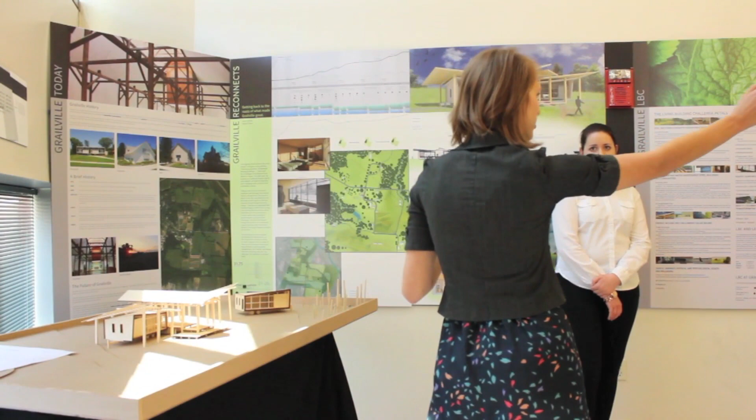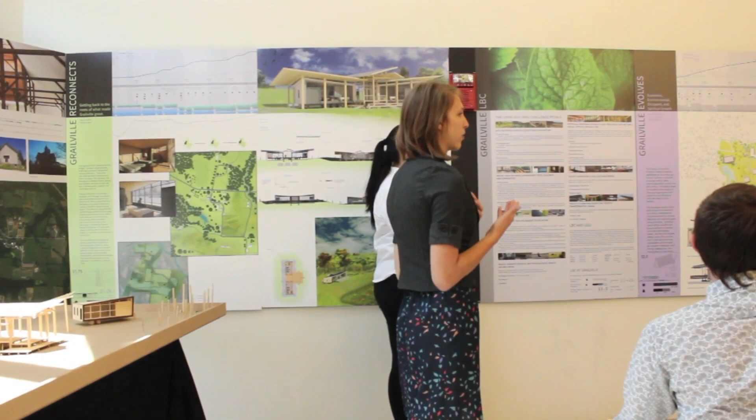Let's get started. To briefly introduce Grailville Retreat Center, the structure of how our studio ran, and then the structure of this critique. So I'll start with the structure of our presentation. You can start over here, and then we'll keep going that way until we hit the last board. The boards with the gray bars on the side, so this first board, Living Building Challenge, Energy, and Water, those are more general boards of research that we did, and they apply to everyone's project. And then the colored boards in between are individual projects done by teams of 2, 3, or 4 people.

How our studio worked, it was set up kind of like an office. All 11 of the 4th year architecture students, who are graduating Saturday, worked together to research all of these things, and then ultimately broke down into smaller groups to look at different ways to go into Grailville and different approaches to it.

So to introduce Grailville, if you want to look after the critique, we have a bit of history. It's a lay Christian organization that was started over in Europe back in 1921 in Holland. And the main missions that the Grail focuses on are equity, justice, education, responsible stewardship, spiritual art, music, and liturgy. And so we wanted to carry forth those key missions into our new approaches.

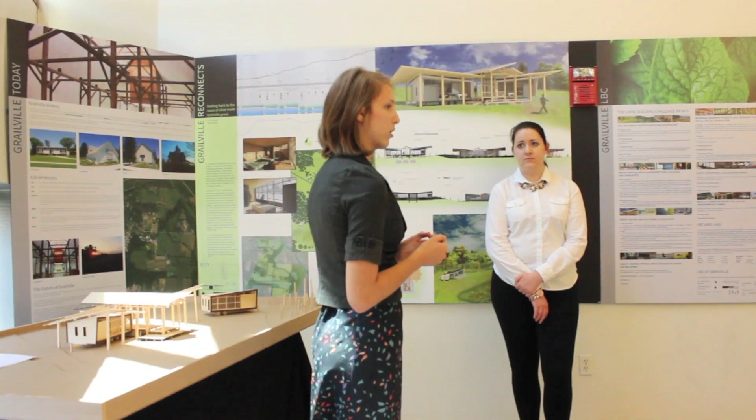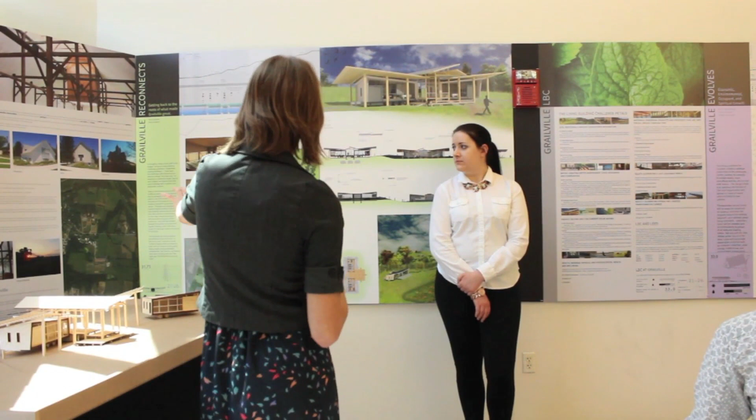They also currently have housing for 50 overnight guests, and they have a dining hall on site. A big client they have is Life Success, and then they have a bunch of smaller groups. They also have an oratory, which acts like a church, so they can host some weddings, across from the main farm of Grailville. And the farm is about 380 acres, a good portion of which is organic certified land.

So I'm Emmy Jensen, and I just want to talk about one of the frameworks that we used for this project, which is the Living Building Challenge. I think most of you have a sort of familiarity with it, but for those of you who don't, it's meant to be the highest standard in sustainable project design. I'm sure many of you have heard of LEED, and it differs from LEED in the sense that LEED gives a variety of objectives, and you can sort of pick and choose a certain number to achieve LEED certification.

But in order to be Living Building Challenge certified, they lay out a variety of imperatives, and you have to meet every single one, and it is all or nothing. So it's a pretty big challenge to meet, but it's something that we really incorporated into our design because we feel that it applies so strongly to Grailville's mission.

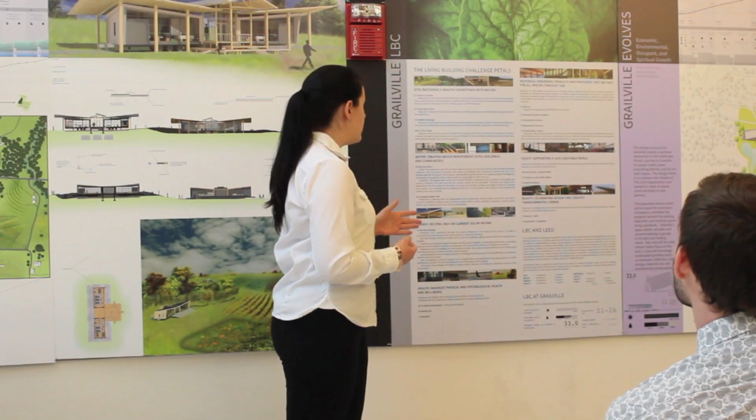So you can look at this and read in detail about how we addressed each specific imperative, but the ones that we focused on most strongly were water and energy. Basically what we have to do for each one of those is to have net zero water and net zero energy. Currently, because of the way that the law and codes are organized, it's not quite possible to achieve those yet, but part of the Living Building Challenge is to raise awareness and to try to change those things so that we can someday have buildings that generate their own water and their own energy.

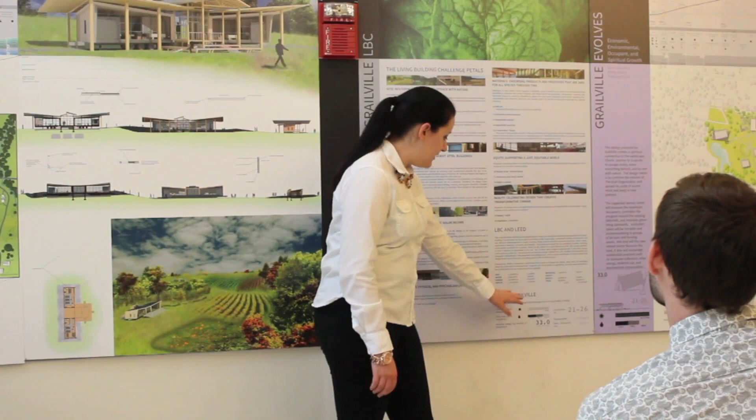Each project you will see has this little graphic in the corner, and this is a key that explains what everything means. Basically, this is how much energy is produced, how much water is used, the cost of construction per square foot, and the cost premium is how much more it costs to build an LBC building versus a typical construction building. So you can see through each project how that applies.

Also, with this bar at the bottom for the water usage, you can see there's black, gray, and white. It relates to black water, gray water, and white water. So white water is sort of like potable drinking water. Gray water is used for irrigation, and then black water is used for like toilets and stuff like that. So black water's toilets. Sorry. So that shows how much water is used comparatively for each project. And it's a lot easier to generate your own gray water versus white water. Usually that has to come from the city.

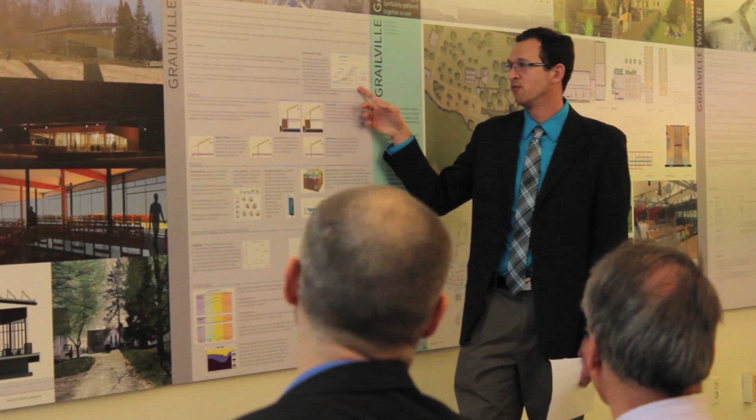A lot of the energy research that we looked into for Cincinnati in terms of weather, but also passive heating and cooling strategies. And the information down here is just basic information about the climate, which I'm assuming most everyone is familiar with. It says that there's a lot of cloud cover. It's also humid during the summer a lot. Wind primarily comes from the southwest. So we took that information and we looked at heating, cooling, and daylighting, and then solar PVs. There's a basic comfort zone that people have, and these strategies allow us to extend that comfort zone into different seasons or different temperatures.

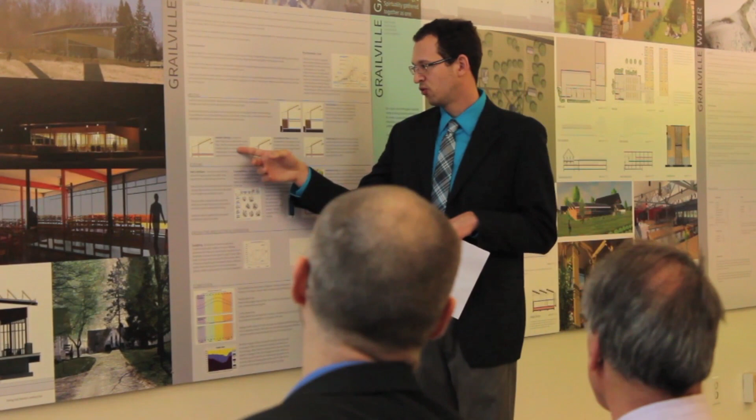So for heating, we looked at radiant flooring, controlled airflow, like moving air through a wall. We looked at thermosiphons, which use rocks to pass heat into spaces, and Trombe walls, where the walls themselves allow heat to travel from outside to inside. And then for cooling, we looked at different types of ventilation, whether it's vertical or horizontal, so stacked or cross ventilation. Desiccant waterfalls remove the humidity out of the air so that it allows you to feel more comfortable.

Geothermal loops can be used for heating or cooling, but the tubes are underground, and underground stays about 55 degrees all year round. So it's a good way to moderate the climate inside. And then a cool tube takes air from the exterior, passes it underground, it cools the air, and then it's pumped into the space. So we used all these strategies in our projects. We picked and chose which ones worked for our designs.

Hi, my name is Jessie. I'm going to talk about water. Water, as LBC outlines, needs to be used and then put back into the environment, and this all needs to be done in a way that is chemical free and doesn't draw water from places that aren't on site.

Unfortunately, the way ordinances in Loveland are structured right now, it's not legal to use your own water catchment as a potable water source. However, rainwater can be used for non-potable purposes such as toilets, landscape usage, and other agricultural uses. So we focused on making sure that we were collecting enough water to be used for those gray water purposes, such as toilets, and then also worked on decreasing the amount of water we need to draw from the city for potable water purposes.

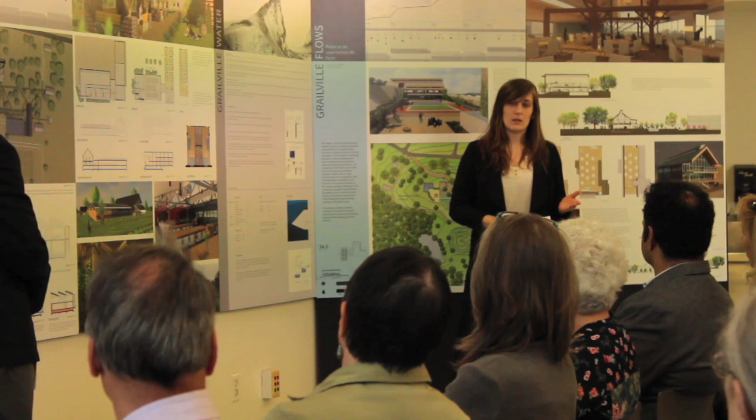When we're looking at water catchment, we're looking at doing that off of surfaces such as roofs and canopies, not wanting to get water from any sort of underfoot surface because that can involve contaminants and animal fecal matter. So we're looking to keep that reasonably clean at least. And looking at first flush systems, a lot of us use this system, which involves a flotation ball so that the first flush of water, which involves twigs and bird poop and all the things you don't want to pump into your system, gets captured, roughly 5 to 10 gallons.

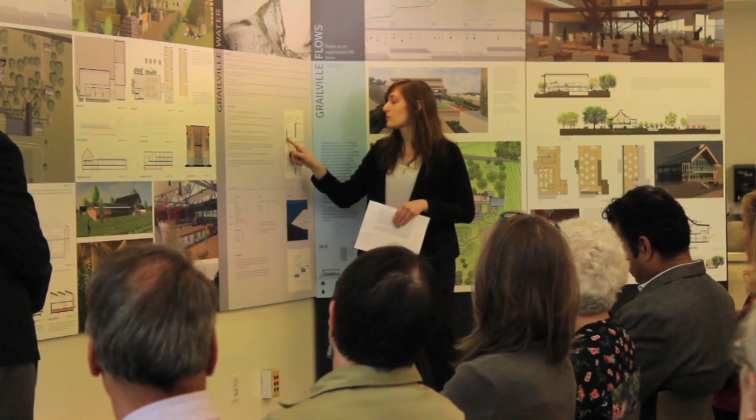And as that's happening, a tube is filled and a kind of flotation ball comes up, and eventually once enough water is captured for that first flush, it blocks off the opening for that first flush system and allows the cleaner rainwater to flow on to be used. And Grailville currently has a natural wetland that helps to process their used water. Ideally, all of this water is still going back into that wetland and being processed.

Are there any questions about the initial research? Paul and I actually used biodigesting toilets too, so it's all out there. It's all different types of ideas. Yeah, it varies by project. We looked at all these things.

Then one question about that water consumption that you mentioned: after you implemented all your strategies, your potable water consumption from what it used to be has gone down to that amount. How much of that potable water that you're drawing from the city is actually used for potable purposes? Well, we debated a lot about whether laundry was a potable purpose or how we wanted to work that.

And we kind of just decided that the way we were collecting water was going to be more geared towards the lesser of the functions. I think we ended up deciding that laundry really was something we wanted to play it safe with, and that's kind of where we ended up on that.

Is there a definition for potable water? I mean, what is it, or is it a gray area? Typically, it's water that is drinkable, consumed. So the main purposes would be showering, cooking, drinking, and other hygienic uses. So you're considering showering because you can consume water as you're showering? Right. And dishwashing was the other. Dishwashing.

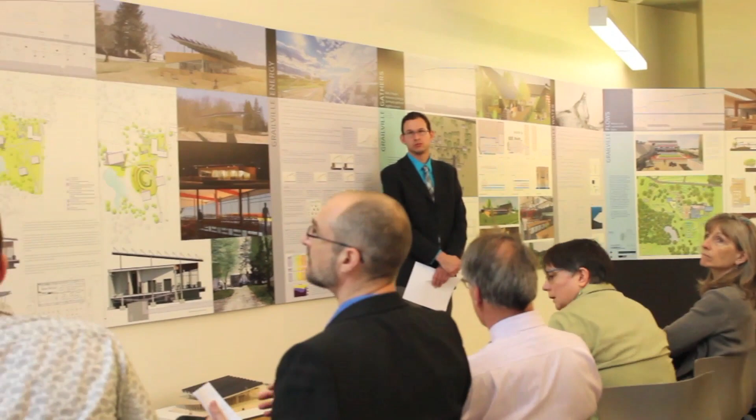All right, then I think we'll get started with our first project, which is Paul and Patrick down here in this corner. So there's two seats down here if you want to scoot your way down.

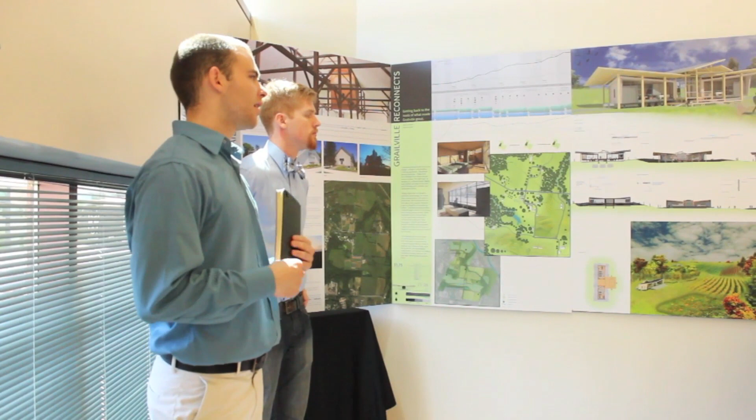So I'm just going to try and explain our business plan, and then I'll hand it off to Paul and he'll explain the building that we designed. For our business plan, like Mary said, we all took different approaches at this issue, Grailville. And our approach really was to return Grailville to its roots. We really wanted to scale back.

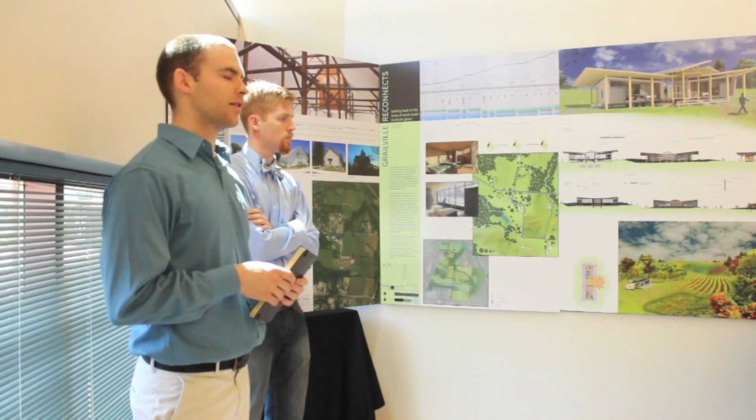So initially, in order to figure this out, we took a look at what was going on at Grailville right now, financially and all of that, and we took a look at what we thought would be a feasible progression forward from there. And the organic agriculture industry really stuck out to us, so that's the direction we pushed this all in. We were really pushing towards scaling all the other programs back down, retreats, events, everything like that, and really pushing organic agriculture.

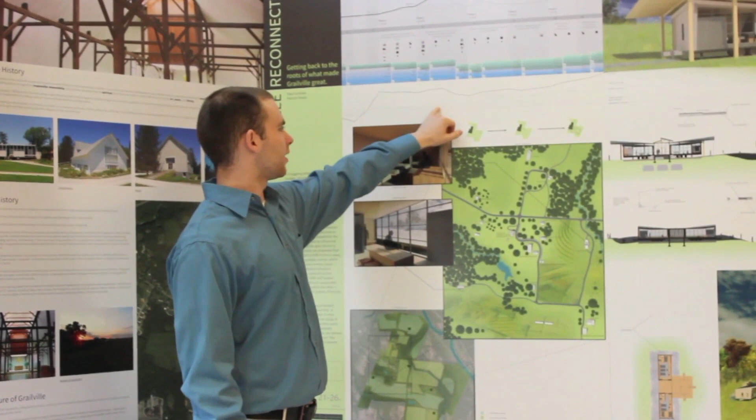To do this, we took a look, like I said, at the programs that already were happening, and the green line right here is agriculture, and we decided to push agriculture, which is also the green up here, and scale everything back down. So you can see as the phasing plan goes on throughout the years, we scaled retreats down and down, and we started building up more and more housing for agriculture because we really wanted to expand on the agricultural base that you guys had already.

And then once we decided that it's time to get back into retreats and we can build off the base that we just set up in agriculture, we designed this building, and the ideas behind it were really to be an extremely feasible and flexible building. Do you want to talk a little bit about the building?

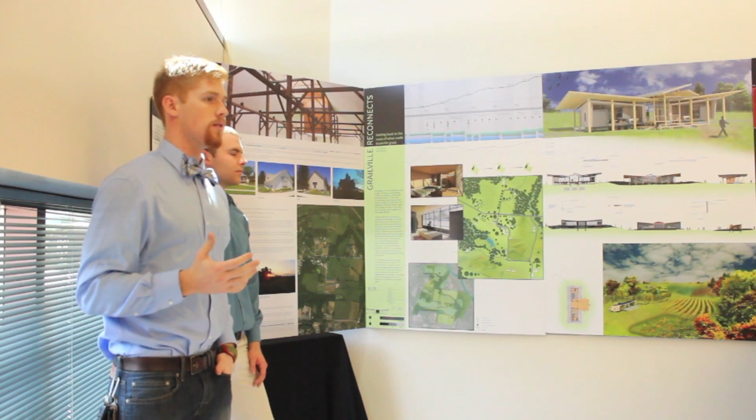Well, it really came down to this: we looked at Grailville and we determined that the most valuable thing that Grailville has right now, besides the people, is the land that it's on. Most of it is certified organic. It's gorgeous farmland which is becoming more and more valuable as the cities are sprawling out. And so we really wanted to take advantage of the assets that you have.

So in the vein of the agriculture ideas and things like that, we wanted to be as minimal as possible with respect to the finances, the impact on the landscape, the history, and so we don't think that very many enormous changes have to be made at Grailville. We think that with little tweaks here and there, we can start getting things back on the right track.

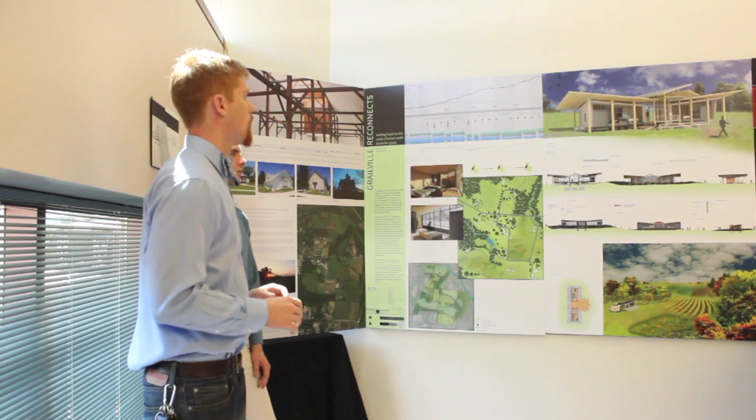And we thought that starting off with these small units would be the right way to do it. So just to explain a little bit about where these came from, from a sustainable standpoint, the unique thing about these units, which are built on flatbed trailers, is that they can be moved anywhere on the site. If somebody needs them over here, you can bring them over there.

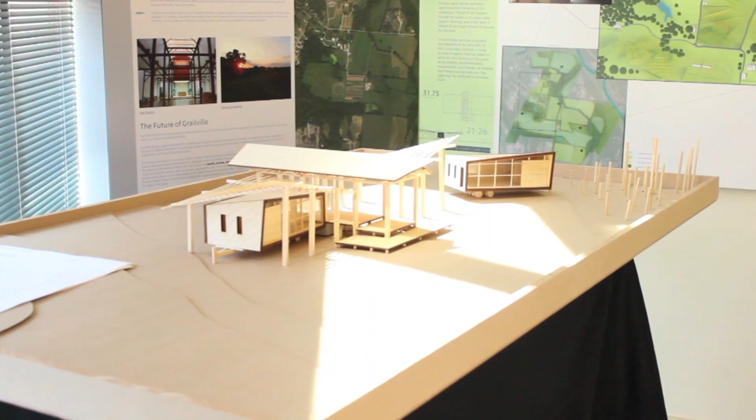If somebody needs them here. And so as we were looking at that and thinking, how can we move these things? How can we make it easy to move, and why would we need them to move in the first place? We kind of realized that the thing that makes the most sense about the movability of them is that you can actually change the orientation seasonally. So, for example, in the summer, you can shade it. In the winter, you can harvest the sun. And so that informed the movability of these things.

And we also decided that to make it easier, we would actually have sort of like a shell, a living unit shell, and then a sort of plug, sort of like a campsite. If you ever have been camping in an RV or a pop-up tent camper, you go to the site. There's a hookup for electricity and water, and so we kind of have migrated all of the mechanicals to the permanent site, which is, for example, this is the summer site here. It's kind of just a canopy for shading, and it's very simple.

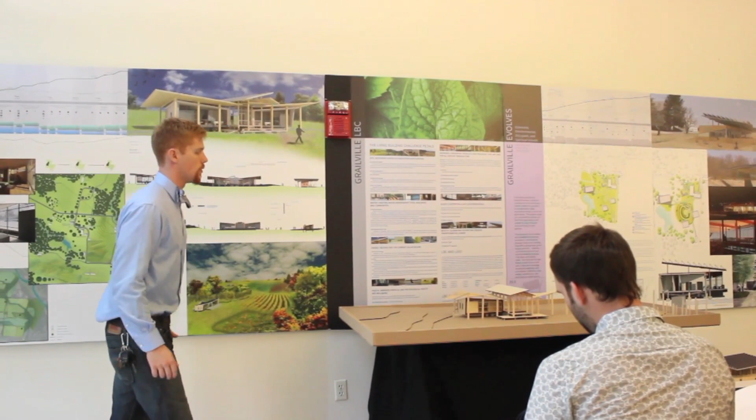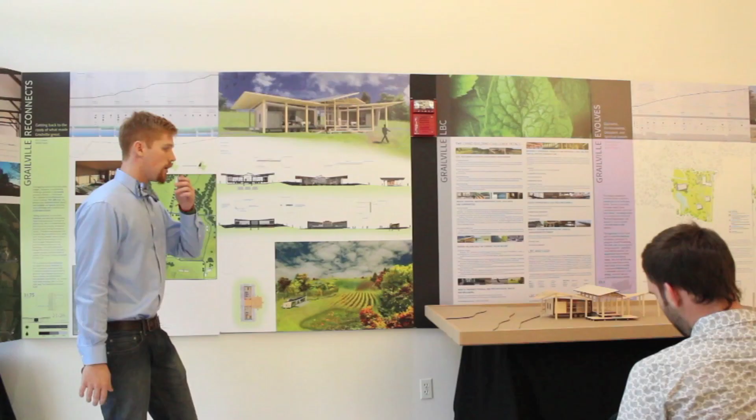It can be used even if the units aren't plugged in. These would be covered. You can harvest the rainwater on top of the roofs. You can put solar on top, and you can actually use the site itself as a way to collect rainwater. And so all of this is kind of contained within these little sites that sit fairly unobtrusively on the landscape.

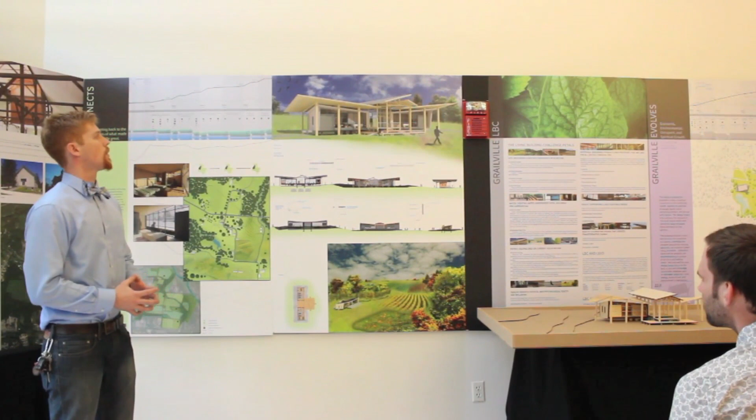And they can be used for other things, like if there is a group that wants, for example, a yoga group, they can go use the little pavilion if there's nothing going on. So we really wanted to make them as flexible as we possibly could, because we're not really sure where Grailville can go or where it will go. So these things can serve many purposes.

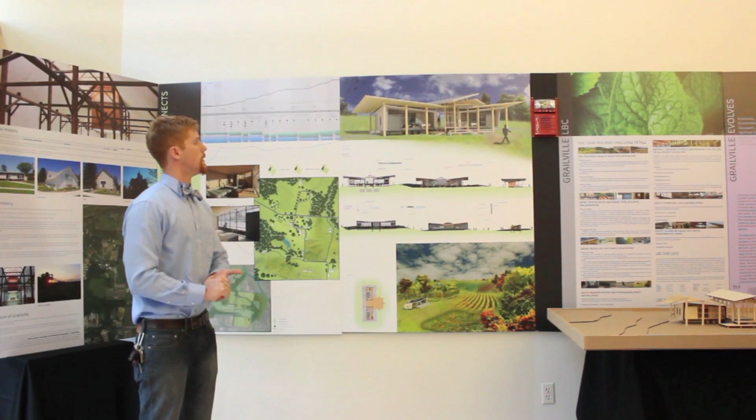There's movable beds. The beds flip up. You can put 8 people in one. You can put 4 people in one. You can move the beds from one unit to another, and so really they can be used for any sort of group that you could think of. And yeah, another good thing about keeping it small too, and having the individual units and being able to move them, is by putting all of the stuff we needed to make it net zero energy, net zero water on the site, then we could keep as little of that out of the actual living unit as possible, which made it even more flexible.

If you look at the floor plans that I'm handing around, it's really just one room and a bathroom, and we were able to do that because we could keep all of the photovoltaics off the unit, and we could keep all the water stored on the site and all the water catchment on the site. And by keeping it small like that, we were really able to reduce the cost per square foot and increase the feasibility of making it net zero.

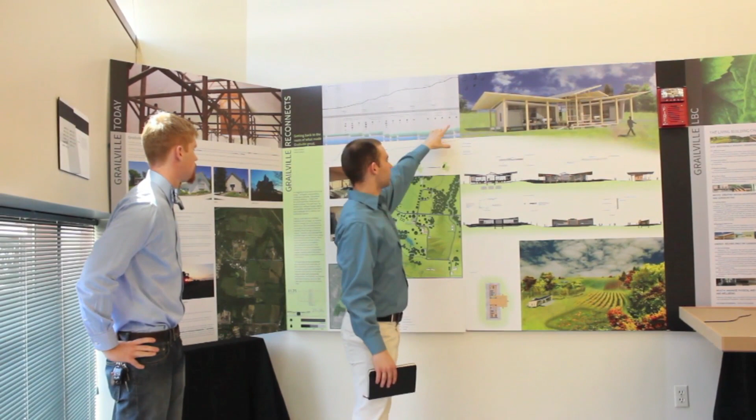That was kind of the idea of scaling back in the beginning and really letting that organic agriculture business idea take root, and then from there we can start to build back up, which is kind of what this is showing. We scale everything back down, and then as we need it, we can start to build back up and get more and more units and more people. And that's actually kind of what this was showing. We gave you additional ideas of where the units could be, which spreads out the program of Grailville.

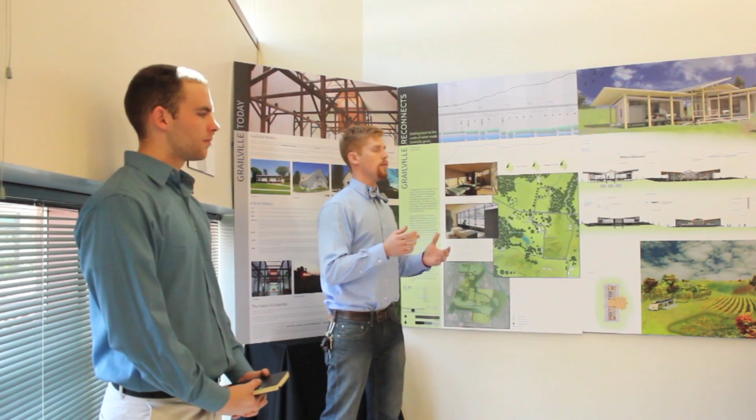Initially, from the beginning, if we are starting to move heavily into the agriculture, there's kind of going to be a rift between the hub of Grailville and then the agriculture. It's kind of going to be separated, and that's just how it's going to be initially. But once we start building these little things, you can put them out here, because nobody ever goes out there, and it's a beautiful site. And we felt that with the hub being so concentrated, that maybe there were some missed opportunities of actually exploring the site, especially in the summer.

We think that in the winter the units would be closer together, closer to the hub, closer to the dining, just so people don't have to walk in the winter if there's programming during the winter. But in the summer especially, people are more willing to walk outside, and so it spreads out. And the other thing too is that you can start making connections between the retreat goers as they start ramping back up and the agriculture.

Maybe you have something where you have intern farmers who are working seasonally. Maybe if they need some housing for just a week or something, they could live in these things, or you can start having interactions between the agriculture and the retreats, and then you have a new dynamic going on where you're kind of rebranding yourself as this sanctuary of sustainable farming and land stewardship.

Again, I'm Mary, and this is Emmy and Bo. And our project extends from this purple bar over to these lineup pictures. And the models we have up here are the site model and a model of the new dining hall, which would be a new building on the site. So, to begin with, when we visited Grailville, we really felt a connection with the landscape, with the pond, with the woods, being one in nature.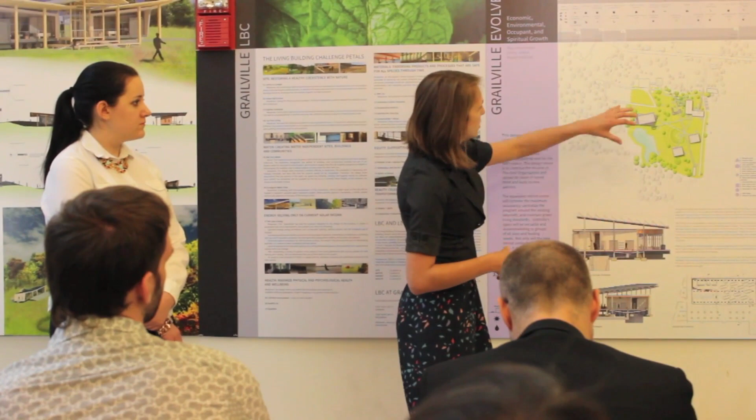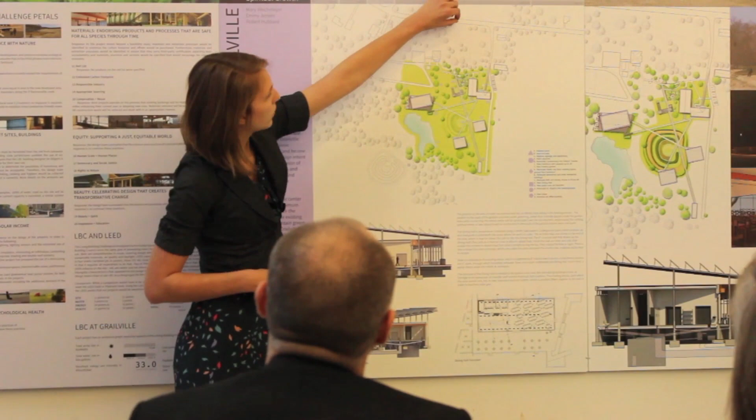So up here is the current hub with the House of Joy, Dining Hall, Hodier, and Caravansary. And we kind of drag the hub down to create this new piece. So we have a new dining hall being built and two new lodges. I'll briefly take you through the procession of the site. So as you approach on O'Banionville Road up here, you come down to this drive, and there's gravel parking here, and then handicap parking up here with some more gravel parking. You walk out of your car, and that image down there is the image that you see as you step out of your car.

So we were trying to figure out, for guests coming to the retreat center, wayfinding, how they would enter the site, what their first visions would be. And when we visited it throughout the semester, we were standing on that spot, and we were just like, this is it. Like, this is actually really cool. That's a very cool view of the Caravansary, which will be the new Welcome Center.

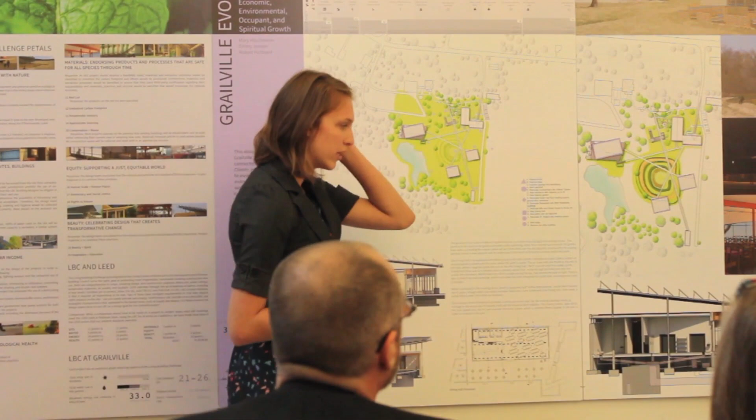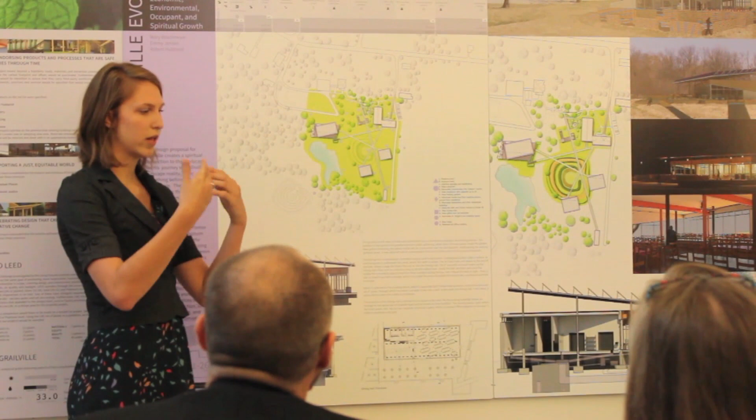And so with that idea in mind, after you step out of your car, we wanted the pedestrians to take dominance over the vehicles. So we would have a pedestrian walkway come right up to the driveway in front of St. Benedicite. So you would walk up to the top floor of Caravansary, which would be the new Welcome Center. It would have history on display, check-in, all of those types of things, and then you would walk through downstairs or take the elevator down, and then you would be in the new retreat center. So at that time, all of your vehicles would be set aside. You would just be in the nature here.

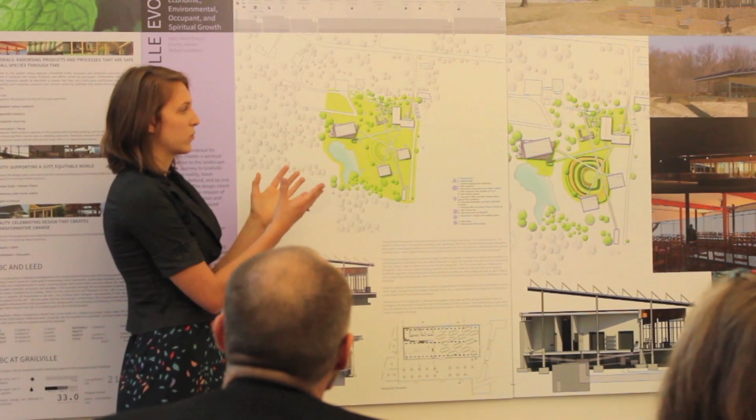And then from the Caravansary, you would walk to, if you're staying in this lodge, Hodier has first floor residential still. We're keeping beds in here because we have a 20-year phasing plan, so this bottom lodge isn't actually going to be built until 20 years later, so we need some extra beds there.

And then the labyrinth, we're moving down here to have it more private across the pond. And we would like to keep, though, an underlay of the labyrinth to signify that it was there. It is a big part of Grailville's history. So we would like to have some dirt paths come around, signifying the old path of the labyrinth, have different sections with materials, but still these hard concrete paths are more dominant in the space of wayfinding between the buildings.

So we have a 20-year phasing plan. Starting with the first year is mostly keeping up with the grounds, fixing the nature trail, adding parking, things we need to prep before we get construction. Then we move into a new lodge right away. We want to make sure that we have a place to put people before we start to add other new buildings. So we're going to add a new lodge. The first new lodge would be this one, sorry, yes.

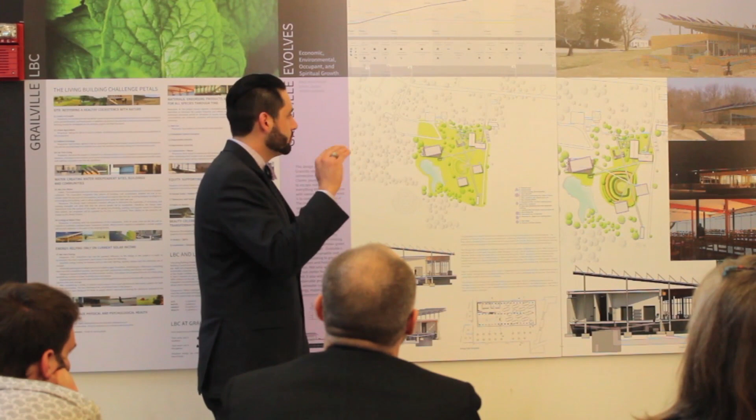So then we're about 3 years in, starts the third phase, and we're going to renovate Hodier and add meeting space upstairs. Right now the attic is unused. We're going to add meeting space up there. You're adding meeting space up there? Yes, like a big open floor plan space, just meeting, reception, whatever still needs to happen, but we're going to use that space.

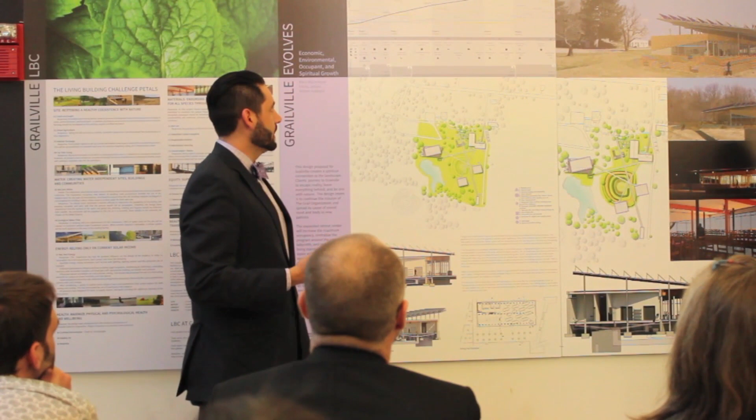Then we're going to add the dining hall, which is our LBC building. It's going to hold 200 people, and it has a lot of space on the exterior as well, which we'll get to later in the presentation. More aesthetics, but then begin to concentrate on moving everything into our new hub. Concentrating on this area, putting in the paths, connecting the buildings. We're going to move into gardening in this area, extending the garden you have right now behind Hodier in front of the House of Joy.

We're going to eventually remove the office building and move all of that into the House of Joy. And once we do that, this becomes the Grail, and everything else becomes the center. So the Grail has its area that the people from the retreat center don't really interact with. That becomes like the member area, but everything else becomes the retreat center. Which is the member area then? The old dining hall and the House of Joy. So it's almost like strips. So this would be the Grail, this would be the retreat center, and this would be more privacy, nature type area.

We also want to remove the Milk and Honey House and continue a path out to the road and move it closer to the road, more of like a farmer's market or a farm stand that you can see, so it gives the CSA an option to sell to more people than people that know that it's there. Driving by, you can stop and buy stuff. So where are you moving it? It's actually this way, it's off the map. So we're rerouting this farm drive from the barns to either, if it'll work, Route 48 or back over to O'Banionville Road.

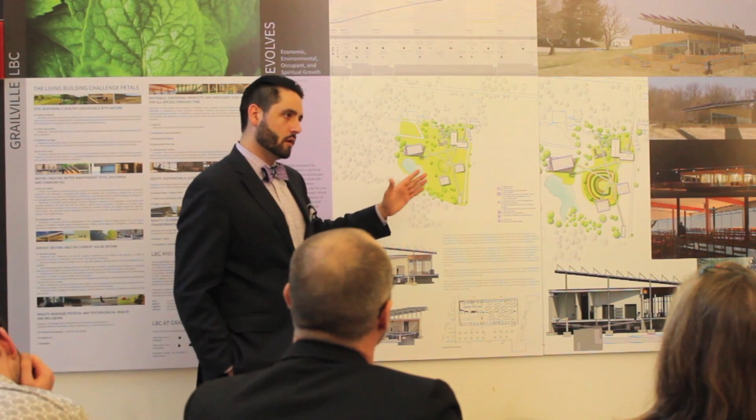Then the end of our phasing plan ends with adding a second lodge as well, which brings our total up to, depending on Hodier, since we didn't really concentrate on how many people were going to be in there, about 110 to 125 people. And then our new dining hall will seat 200 people, with the idea if there's a wedding, they can come over there and have a reception in the space, or a reception in the second floor of Hodier.

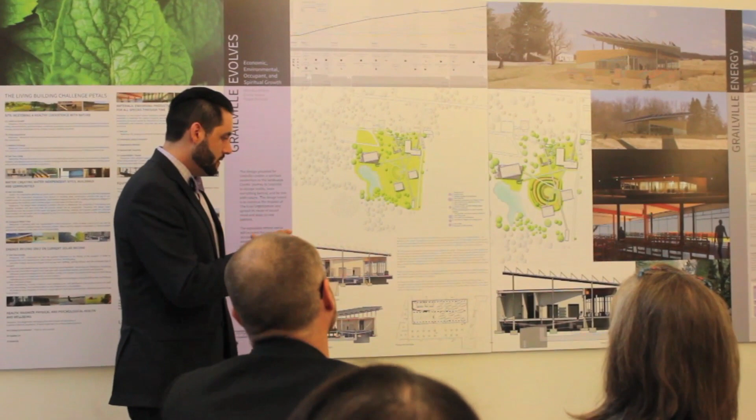The building has two different structural systems. There's two crossing column grids. All the buildings on the farm face the road. They're square to the road, and that wasn't optimal for photovoltaics. So we wanted to keep that feel of the farm, but shift the shading device on top to optimize the direct sunlight that we needed.

So that's how we're going to power the building, PVs on the roof. There's about 8,000 square feet of photovoltaics on the roof. Then cooling: we have a cool tube that runs underneath the pond. There are vents, you can see it in this floor plan, that go all throughout the space. It's going to bring the air up. There's also a fan at the base, just to force it up a little bit.

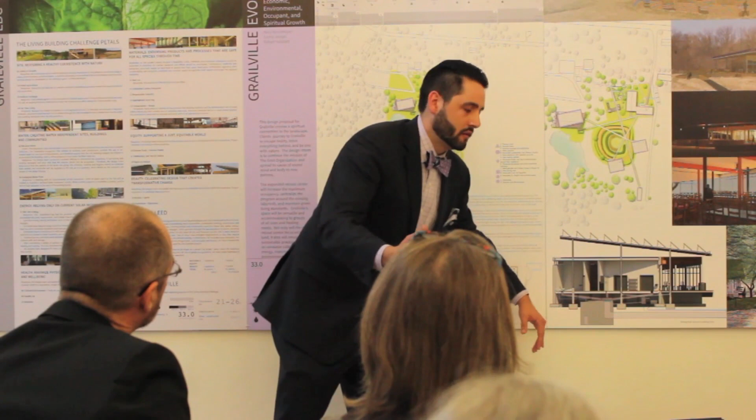Our water collection system is also in the shading device. It's tube steel that's going to run up to support the PV, and it comes back down with gutters built in through the structure. That's going to bring the water down to water collection storage under the ground. Can you say that again? Yes, ma'am. So the water goes down through the structure here, and it's collected into tanks below the ground. The tanks are kind of like what you have right now underneath the dining hall. We're just going to collect it from this rooftop here. And then there'll be two additional smaller tanks on the front deck where this structure comes down in the front.

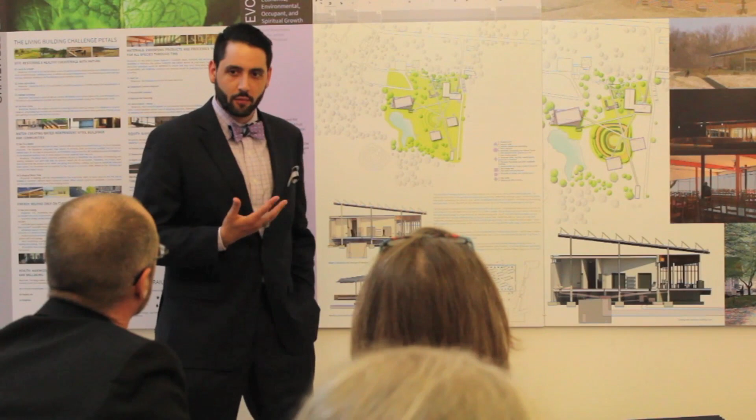Is the tube steel the downspout, or are you having an independent downspout separate from the structure? It's inside of it. You're not using the actual structure as the downspout? No, not the structure. It's inside the structure. So you have a separate downspout pipe that's surrounded by the structural tube? Yes. And what is the material of your downspout? I don't really have an answer for that. We didn't really talk about the actual material. Clearly, it's not PVC. No. I know I said that a minute ago, but as soon as I said it, I knew I can't do that. Cast iron.

And how does the water actually get to this downspout piece? Are there channels or something underneath there? Yes, where the column grid is, there are channels built in with crickets that can stop the water. As it goes further down, there should be less and less water being caught. That's why the very last row goes down to tanks on the deck to water the irrigation on the outside. Any questions?

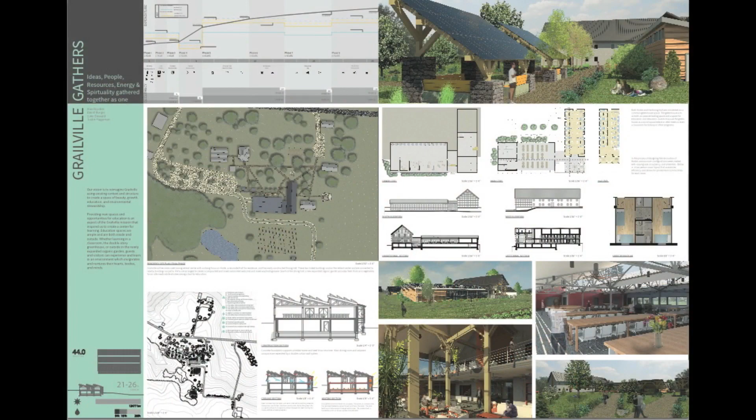Hi, my name is Luke Dewell. My name is Justin Hegeman. I'm Alex Reardon. And I'm David Burbank. So obviously you can see by the name of our board, Gathers. Our main focus was to recreate Grailville as a retreat center that has a cohesive design and can work for a lot of different people.

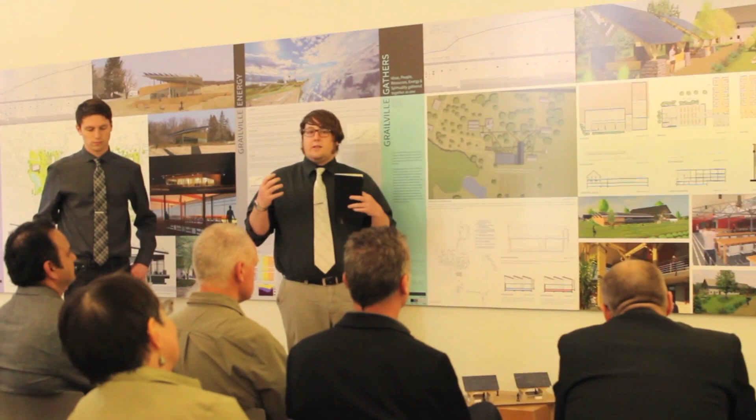We really like the land at Grailville, and we think one of your biggest problems is actually the hub itself. A lot of the people coming in are complaining about having to walk from where they are to the dining hall and back. We think that's okay; we really want them to be outside of the buildings, not just inside their living quarters. But it should be an option to be a little closer, and the hub itself should have nicer areas to walk through, so it's not just walking through and thinking, I'm behind the building, I need to get around to a different side. So we really wanted to connect things together.

For this retreat center, we focused mainly on two buildings, Hodier and the new dining hall, and those two combined create a larger client base for Grailville. We didn't want to exclude any of the client bases you currently have, but we wanted to upmarket Grailville so that you have more reach, both financially and to spread your message. So we focused on Hodier, it's kind of a complete redo, Justin will get to that in a minute. And this is the dining hall, David will get to that in a second.

For the overall site, in terms of procession, we kept the two main driveways Grailville has currently, but we reordered those functions. This is now the main entrance, and it comes down to this gravel parking lot. We wanted to offset the idea of a large sea of gravel, so there are plantings and trees within it. It's still a parking lot, but it offsets that a little. And there's also parking over here for access to Benedice and things like that.

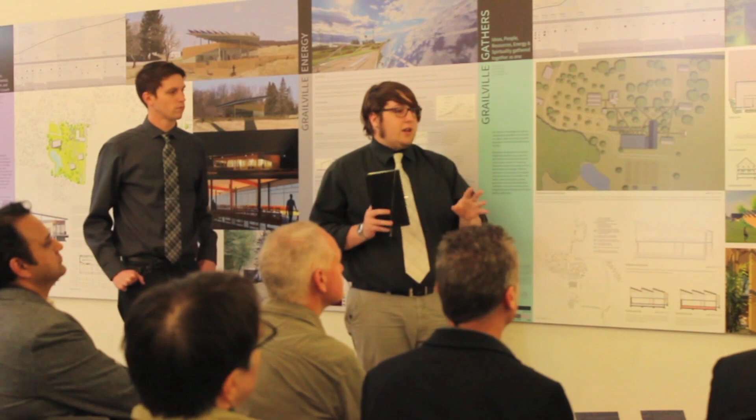Other than that, we've included some site pieces like a fire pit and a large speaking space. We also moved the garden space from over here and expanded it so that it's more of a key piece. You can see in this rendering that it's right in front on the site. When you get out of your car, you'd be here, and that's this view, looking straight over to Hodier. And the shading device, which Mary mentioned earlier, I call the solar pavilion. That's this model here, if you want to hold it up real quick.

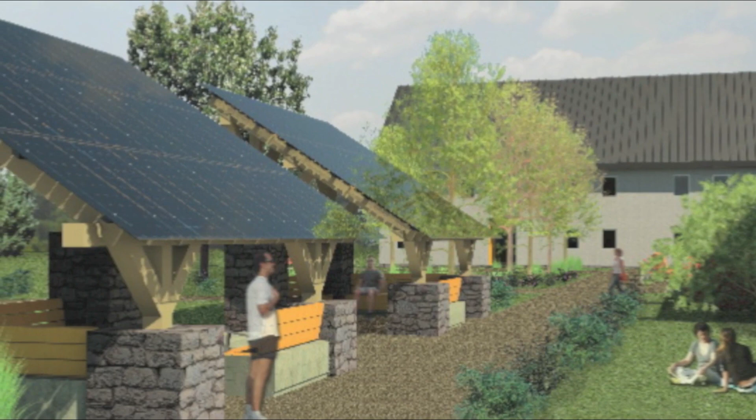So these are spread out through the site. So they combine the solar PV, some shading, and areas for people to meet around the site. You can see there's two more at the end of the garden and even more down throughout the site itself. These are kind of that educational piece so that people can see the PV. You can see what's happening in Grailville.

If you go into one of those pavilions, there could be a screen there to tell you immediate output of what's going on in the PV. You can see that energy that you're capturing at Grailville.

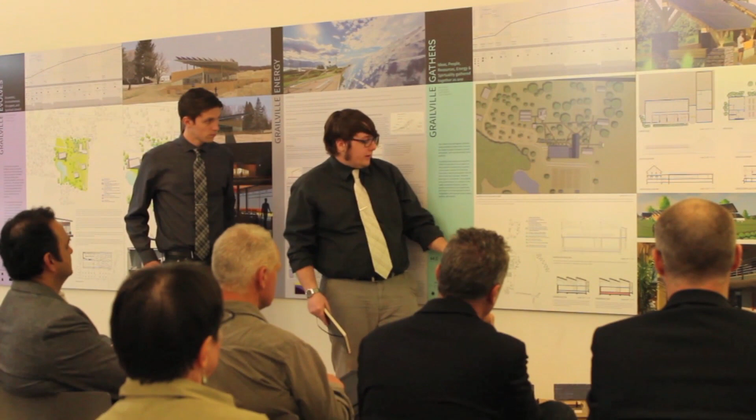So outside of the hub though, we've also included some major updates to existing buildings. We've added a new road coming from the back part where there's the farm and tractors, so that the CSA would have their own farm stand, connect up to the road, separated a little bit from the people that are maybe having a retreat on Saturday, don't need a bunch of cars coming in for people to get their vegetables.

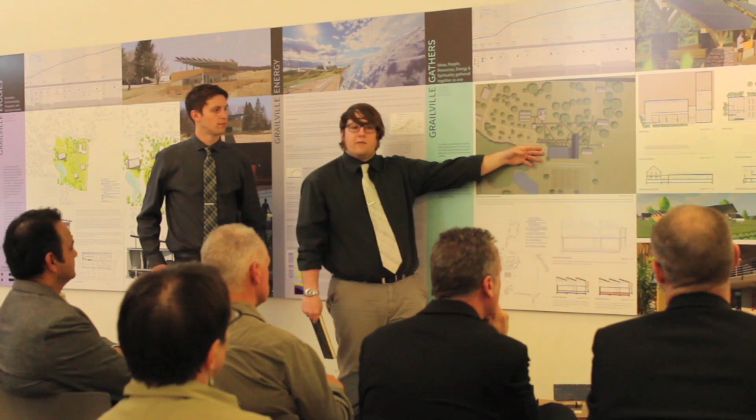And we've also expanded, hopefully Grailville can attract some more weddings eventually, so the dining hall is part of that, so that it is large enough to accommodate wedding space. But in the future, if it was necessary, there could also be a reception hall built up there.

So with Hodier right now, it currently has seating for about 26, and we were looking at a way to possibly make that more efficient or fit more people in there. We ran through a number of different scenarios where we looked at what was the best way to put beds in there. Was it to have one person with their own private bathroom, all the way up to having just 4 rooms with 15 people in them.

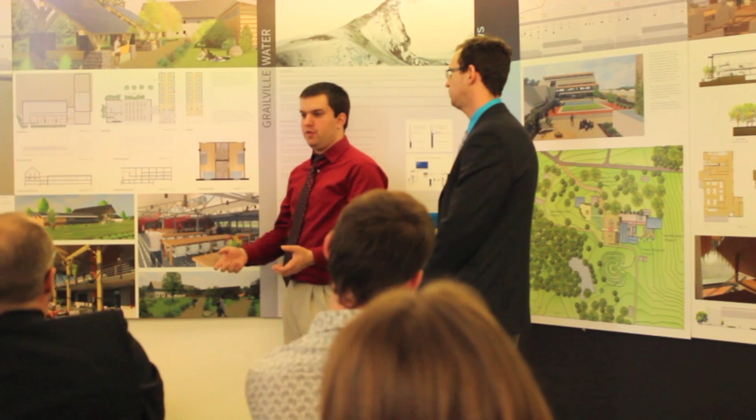We ended up settling on this configuration, which is 2 beds with their own private bathroom. The beds would kind of have the storage underneath where you have your drawers for people that were staying for a longer period. We could fit a desk or 2 in there for people that wanted it for meditation or writing in there. Hodier then, instead of 26, would hold 64 beds inside of it.

And then on the southern end of Hodier would be some indoor areas for kind of small activities, groups of 8 to 10 or smaller, and then part of that would be this greenhouse and sun space, which you see in this rendering here, which is part of the area that connects to the dining hall, but would allow for kind of an indoor-outdoor space that could be used throughout the year. And then talking about the dining hall, Dave is going to talk about that.

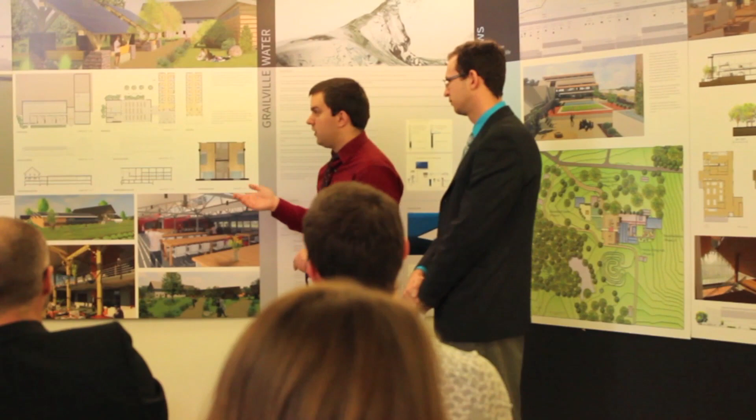For the new dining hall, I wanted to make room for about 200 people, for weddings or large events like this Easter gathering we had this last week. I decided to go with a sawtooth roof configuration. This would provide a couple entry points for sunlight to come in from the north side.

We had a sun space on the south side that overlooked the gardens, kind of reminding people as they're eating where the food's coming from. Now, probably not all the food for these 200 people would be able to be harvested from here, but it kind of reinforces the idea.

So we added kitchens that were larger because we felt the current dining hall didn't have adequate facilities for it. This would be able to serve 200 people, weddings, retreats, hopefully be more of a catch-all. Beneath the dining hall on the lower floor, we have a couple small classrooms, as well as a large space for storage and utilities.

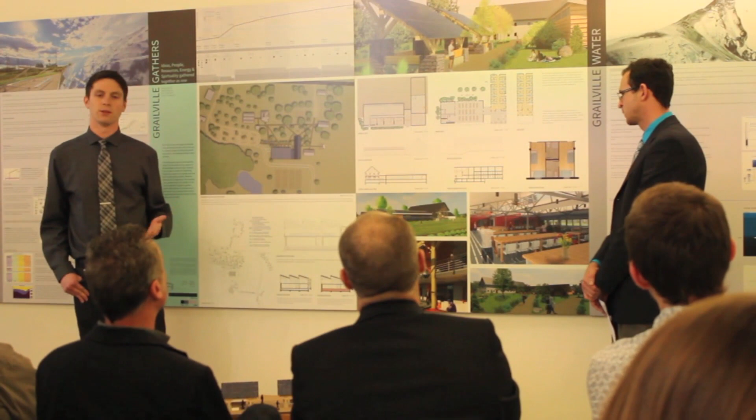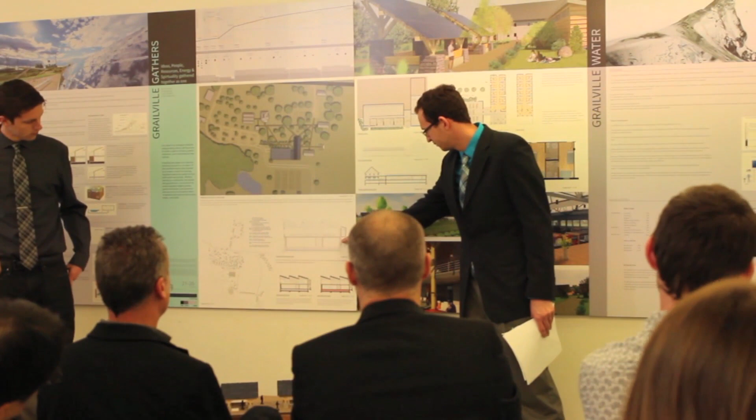We'll talk about the sun space then. Yeah, the sun space is about 4 or 5 feet in width, and it runs along the entire dining hall. It is used primarily as a way to harvest energy. So we would be heating the interior spaces via the sun space.

The heat would be gathered in this confined space and then directed through vents into this rock bed, which is below both levels. This rock bed would heat up, capture that heat, and then it could be released later. It wouldn't have to be released immediately, and it would be released back into the building via fans and ducts.

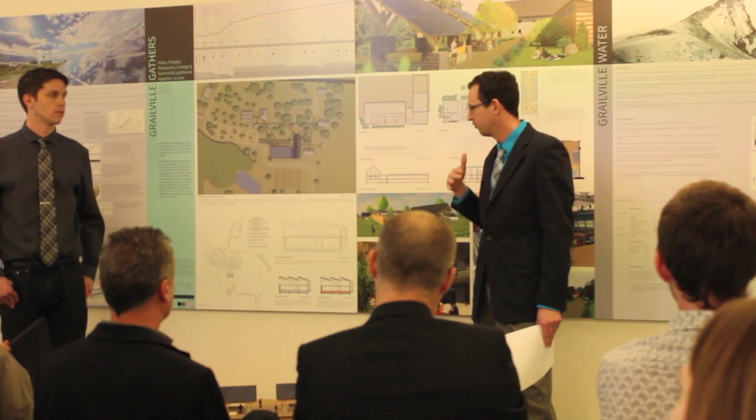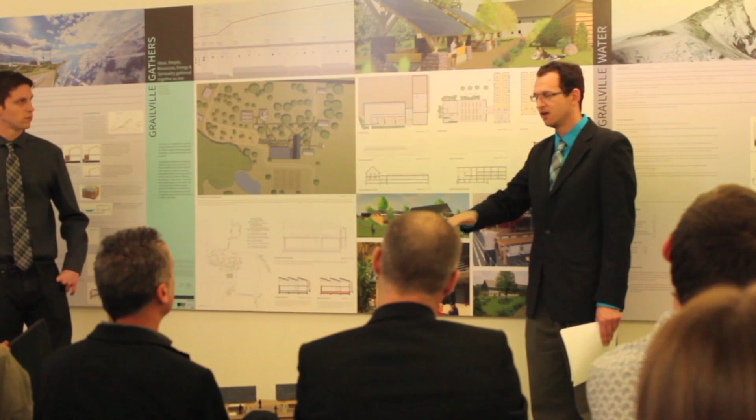And then for cooling, there would be windows on the north and south facade, which would allow the winds to move through the building. We also have movable panels. These panels are able to slide in front of this glazed facade to cool the space from direct gain. They have insulation within them, so they provide a barrier from the heat if you wanted to cool the space.

In terms of energy, we have the solar PVs on the roof. We have water collection from the roof, which goes into storage tanks located in the basement. Yeah, I think that covers it. Yes, for rainwater, yeah. So those cisterns, similar to what the dining hall has.

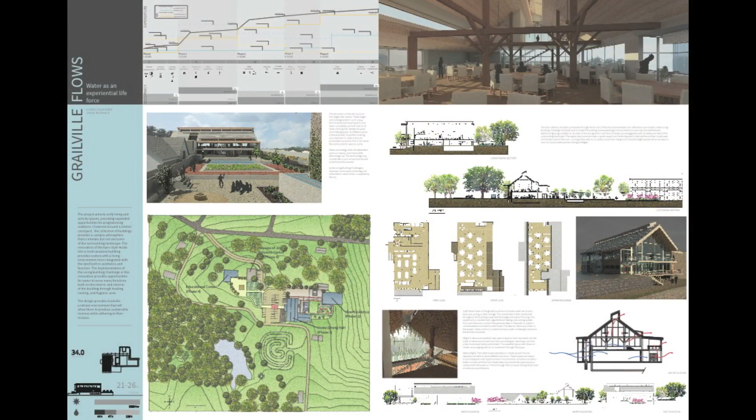Well, in our approach, we looked at the idea of taking the main retreat functions, such as dining, meeting space and residency, and centralizing them around a collection of outdoor spaces.

Jesse, I don't think we can hear you. Oh, I'm sorry. I'll speak louder.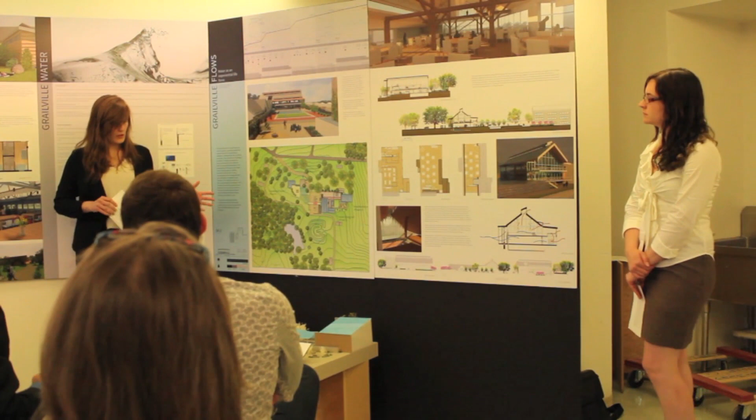So the idea is this would create a more unified complex that would allow groups to connect with the landscape without excluding them from it. These spaces would also serve as parallel outdoor spaces, so that functions that would normally take place indoors could take place outdoors as well, again encouraging that connection to the land that Grailville has. This provides ways for people to better enjoy their surroundings.

We focused on Hodier for our Living Building Challenge, and right now it's used as a residence. But we examined the buildings on the site, and we decided that a residence isn't really a good fit for Hodier because the rooms are small. So we made a new residence on the northeast. This allows us to accommodate current clients, but also more upscale accommodations for possible future clients, and Grailville could decide what they needed specifically.

So for Hodier, we decided to change it into a dining hall. We chose Hodier because it's iconic to Grailville, and they wanted to keep the character, but we wanted to make better use of the space. This is the upper floor of Hodier as we redesigned it. It allows the timber frame construction to show and be appreciated. We also added glazing on all 4 walls to allow for views of the landscape while you're dining.

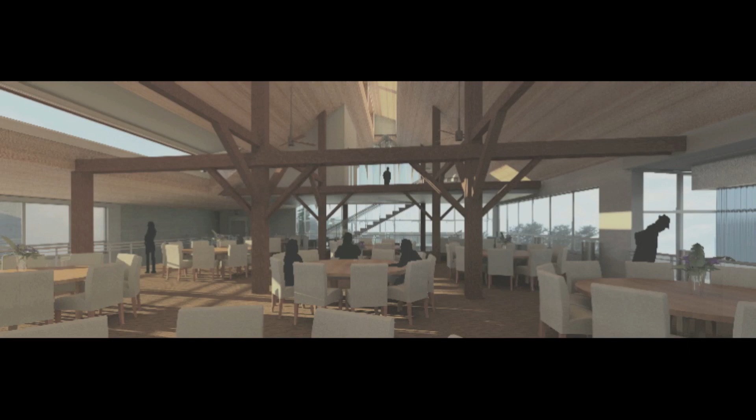On the first floor, we decided to make flexible meeting spaces that could also be used, as was mentioned, for dining if you wanted to separate the spaces a little bit. And the kitchen for the dining is on the first floor. Hodier is a repurposed barn, and the whole idea is we want to keep that character.

There is a building called the Caravansary to the east of Hodier, and we made a connection to that building to provide space for mechanical, and we added an elevator to make all of it ADA accessible, which is a big thing for the Living Building Challenge. It also provides another point of access to both buildings, because there are meeting spaces in the Caravansary, so it makes it a little bit more inclusive.

Where is the elevator? It would be in this junction between the buildings. And on the diagram, where is it? Over here. So you can go up these stairs to get to the top level, or take the elevator here.

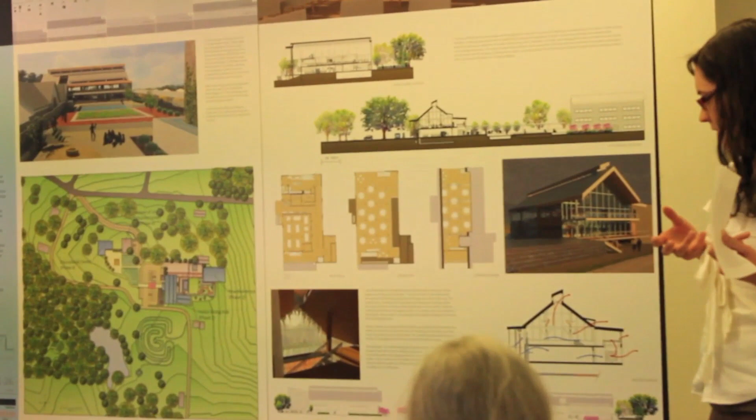We also added a bay to the south and to the east to provide room for this meeting space that we put in, as well as for better circulation. It also allowed us to put some double height spaces in here to add a visual connection between the first and second floor, as well as to have more cross ventilation through the whole building.

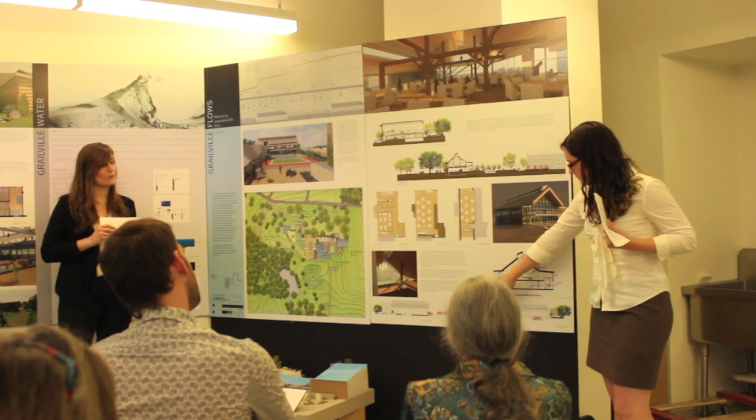We also did the evaporative cooling tube, like Alex mentioned, to get cool air into the first and second floor. And this here is a desiccant waterfall. When the west winds come in, they go through this and it dehumidifies the air, so it can cool off the space better. I'll talk more about how that works exactly.

And on the south side, we designed these water tubes as a feature, and we wanted to utilize the south energy as much as possible.

All right. So really our main design driver was water. And in this project, water is used for a lot of things, the typical uses of drinking and toilets and things like that, but also it's used for heating and cooling and dehumidification. And so we really wanted to take those functions and create this aesthetic presence within the space to showcase how that's happening and use it to the best of our advantage in order to create a comfortable environment outdoors.

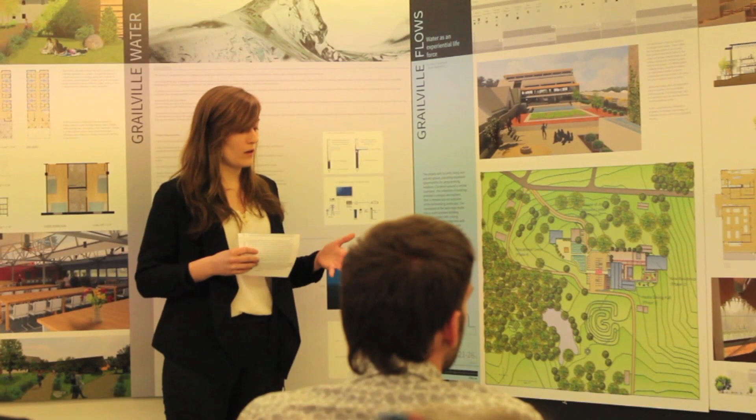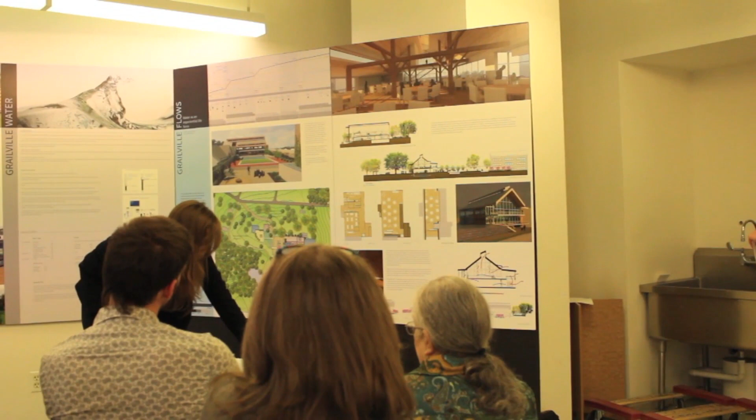So I'll start by explaining the model. And I'll shift. Yeah, I guess I should. So I'll start with our rainwater collection. We have rainwater collection planned for the roof of our new residence. This isn't the whole residence, we kind of chopped it off, but you get the idea. It's coming down this roof. The idea is then that it's being held in a kind of reservoir in the side of the building that then slowly releases it down an acoustic accent wall.

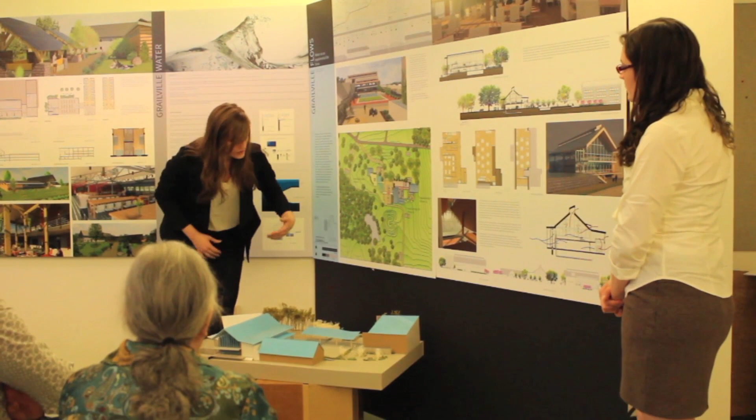So rather than just having that water coming down and being a feature when it's raining, which is when people aren't really outdoors anyways, it's held there. We designed it to be built into the new structural system of the new residence. So it's coming down this accent wall into this trough where it's difficult to see, but the idea is this is where the first flush system would be. So it's taking all of the unpleasant things and starting to fill in these water tubes systematically.

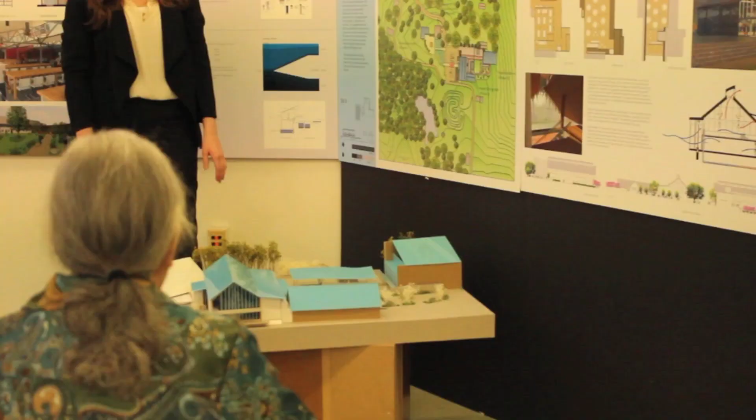And then as that's happening, people are able to see these balls rising, as the first flush is taken care of, to cut off filling those tubes anymore to let the cleaner rainwater continue naturally. We wanted these two sides to remain different because they're programmatically different, but for there still to be that cross access and to have access to the welcome center.

How does the food get from the first floor kitchen to the second floor dining room? There's a food lift. Is it near the, where is that? Oh, that's another thing we didn't talk about, but yeah, it's back there. So we're looking south here, but that would be behind in this area, and there would be like a server station where people could get the food and then distribute it throughout the dining room.

Did you have a particular reason for putting the dining room upstairs? We really felt like we wanted to take advantage of that aesthetic. David mentioned the oratory has that really stunning timber frame construction. And we felt like lifting the dining hall up there would allude to that similar aesthetic and also provide views out to the landscape. So while people are dining, they're seeing these spectacular views of the landscape, and it just becomes a really pleasant space to be.

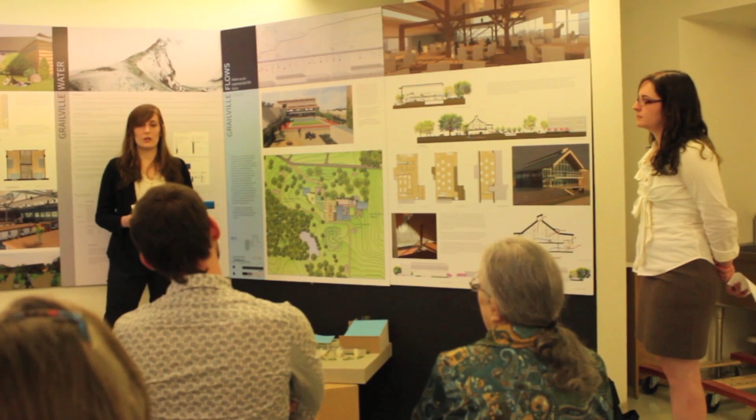I'm just wondering how the kitchen staff would react. Okay. Yeah. It just does complicate things logistically. You always look to have this beautiful space that you could use as a dining area too, and then you'd be closer. Yeah. Right. There's a stairwell back there. It would involve going up and downstairs to a certain extent, but we did include a food prep place in the kitchen. So ideally, you'd be able to make more efficient use of your trips to prepare everything and then lift it up to the top floor.

I want to say that I think there are really fantastic kernels in each one that excite me personally, and that I'm really grateful to you all for your very best energy. And I think it really worked well, and at a certain level, I think we may have been the client from hell. Well, just that we had a lot of requirements and a lot of problems to throw at you, and you really worked hard to respond to what we needed, and I'm really grateful.